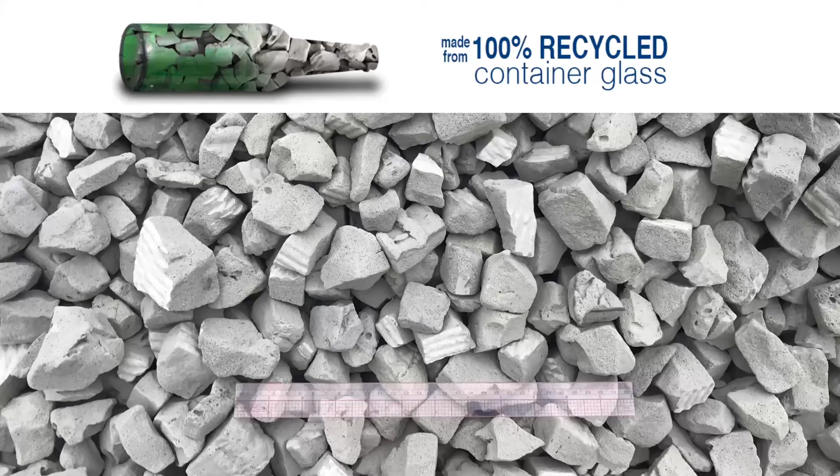All right, so the product that Aero makes is called Ultra-lightweight Foamed Glass Aggregate. And the photo that you see on the screen is a picture of foamed glass. I put the ruler down there at the bottom just so that you get an idea of scale. So it's a 12-inch ruler. So you can see that the particles themselves are going to be on the coarser side of most aggregates that civil engineers are used to seeing, right? So more of a ballast rock size as opposed to a typical 3/4 inch or 57 stone aggregate. This photo also gives you, I think, a pretty good idea of what that surface texture is of our material, right? So oftentimes I describe foam glass as a manufactured pumice material.

All right, so we are made from post-consumer recycled glass. We're not using silica, anything like that to make glass. We're using all recycled glass in our process. All right, so if you've never heard of foamed glass aggregate before, these are some of the attributes that we like to talk about in reference to our product. The first thing is that UL in front of the FGA abbreviation, and that stands for ultra lightweight. And the reason why we coined this ultra lightweight instead of just lightweight is because there have been many different types of lightweight aggregates available in the marketplace for many decades now.

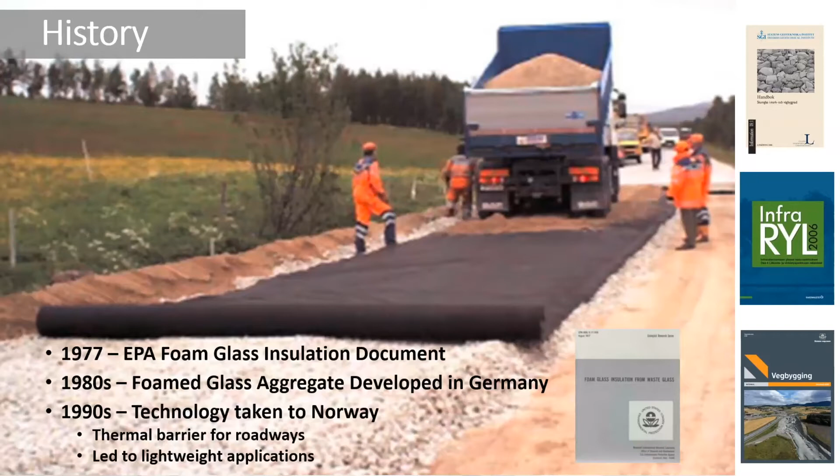All right, so as I said, our product is made from post-consumer recycled glass. It's generally collected curbside. And I know that this audience that I'm talking to now, you all are probably well versed in some of these statistics that I'm going to be sharing, but I always ask this whenever I present. I do a lot of education to engineers, architects, other stakeholders involved in our projects.

Because certainly I grew up learning that glass is this endlessly renewable resource that you can just continuously recycle into a new glass bottle or jar, and then you see the data, and it's very clear that we're not even doing that for 1 out of 3 of our containers that we're using.

All right, and this is definitely not my area of expertise, but as far as I can tell, there's a bunch of reasons for this, but I'll just highlight a couple of them. The first one is that most of our waste is managed in this country on a very local level, right? So you have maybe challenges related to organization, resources, that sort of thing. Everybody can make their own decisions. And it lends itself to a somewhat broken up system in how we're collecting glass, how we're recovering glass and recycling it.

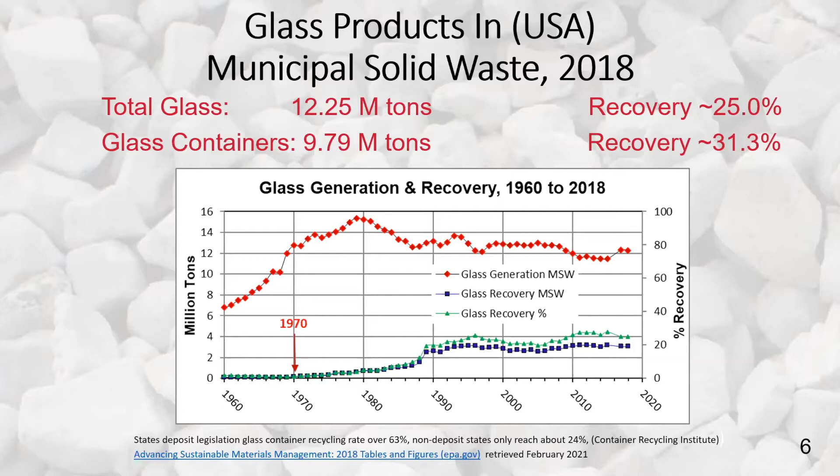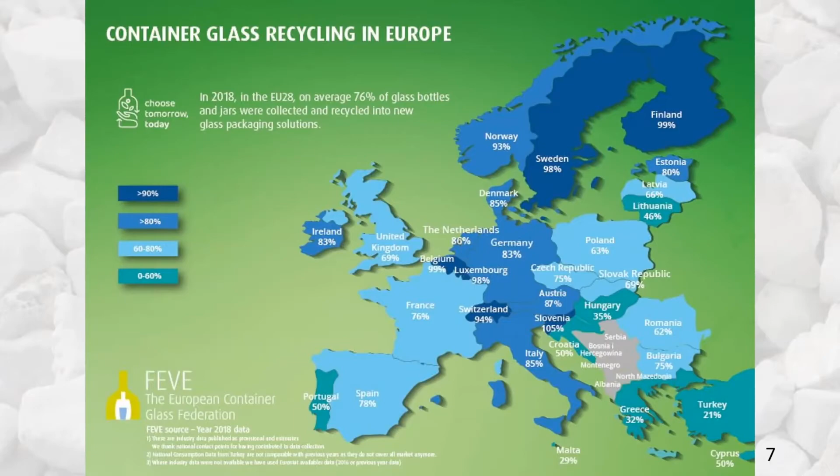Certainly we can look at those countries in Scandinavia that are over 85%, all of them. But in general, almost every country is doing better on the whole than we're doing currently in the US.

All right, so I want to tell you a little bit about how we make our product. One of the things I haven't mentioned yet is that we're actually able to take the glass that generally nobody else wants to take in order to recycle it into a new product or a new material. And that's these fine bits of mixed color glass that, as you know, generally can't be used to make a new glass bottle or jar. That's because they're too small to be properly color sorted, and most glass recycling processes need all of the same color glass in order to feed the bottling lines.

All right, so we're able to take these fine bits that, as I said, generally nobody else wants. When we get it, as you can tell, it's a fairly dirty stream.

Certainly we work with many different suppliers, and there's different values to the glass that we receive. Certainly the dirtier the glass, the less value it has to us, because we have to put in a lot of energy and effort in order to pull off all of these impurities that are not the glass that we're interested in.

So the very first step in our process is to do the best that we can to clean the glass. And the way that we do that is everything's dry. We're not using any type of effluent or wet process anywhere. We're using a lot of screens. We have several magnets in the system, vacuums, dryers, those sorts of things. But generally, it's a completely dry process, and we're trying to get the glass as dry as possible during this process as well.

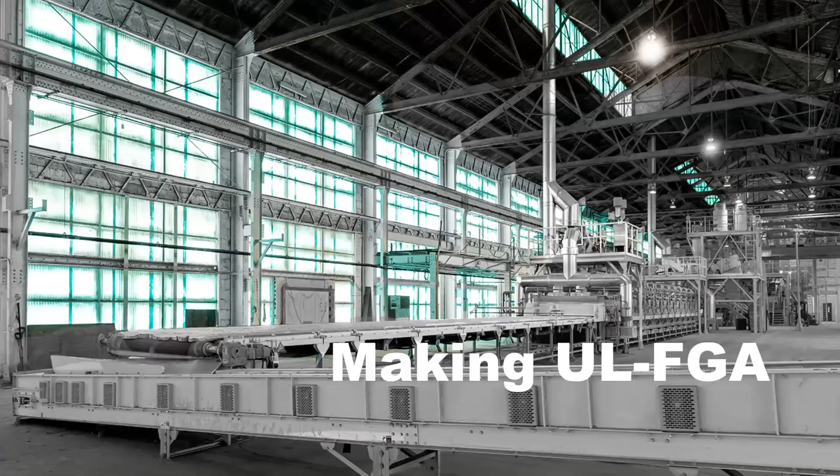I liken it to kind of the all-purpose flour that you would bake with. It looks very similar to that. The particle size is about 65 microns and finer. And when you mill the mixed color glass cullet down to that particle size, the glass can't reflect light in the same way. And so we truly are left with kind of this off-white, creamy colored powder that does look very similar to all-purpose flour.

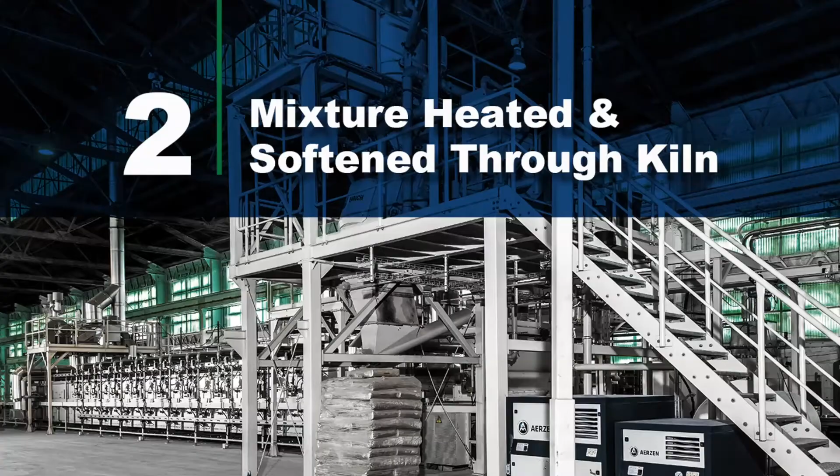All right, so if we look at the back side of the kiln where material is exiting, this is what we see. And it's a solid foam glass cake at this point. It extends the full width of the belt, which is just under 2 meters. And we've expanded that powder height. I mentioned it started at around 20 millimeters. When it's coming out, we've expanded it to about 70 to 75 millimeters. So you're seeing a volume expansion of about 3 to 4 times that initial powder height.

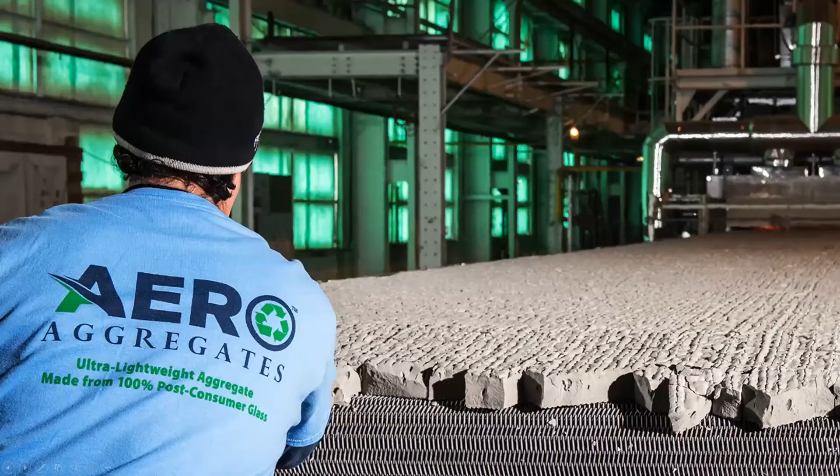And if you would walk along the cooling table with the product, you would be hearing this snap, crackle, and pop sound. And what that is: because of the temperature differential from being in almost a 1,000 degrees Celsius kiln to then being exposed to, say, around 20 degrees Celsius room temperature air, that is inducing thermal stress into the foam glass cake, and the cake starts to crack up. So by the end of the cooling belt here, we've already created these aggregate sized pieces that are going to fall onto the conveyor, as you see here, and head outside.

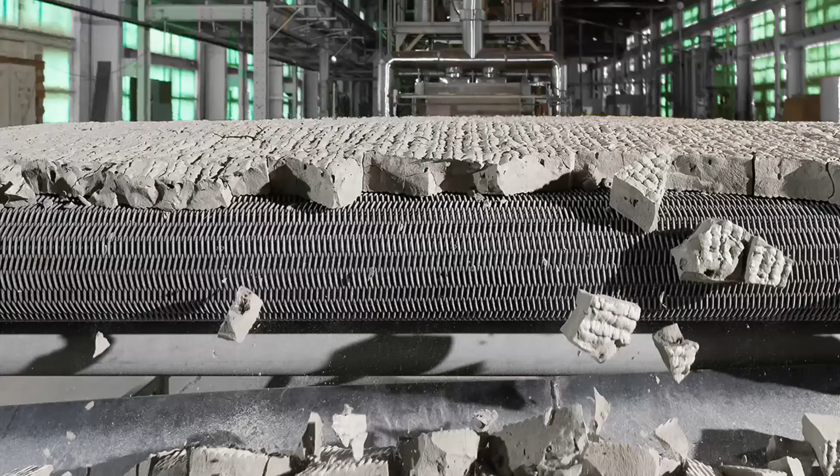All right, so product is still certainly warm here at this stage. It's not completely cooled off, but it's cool enough to have induced that thermal cracking that's necessary to have pieces of product. All right, so at this point, it goes onto the conveyor and it goes outside. We do isolate product until it's been quality control tested, but once it is QC tested, it goes into the larger product stockpile.

Okay, so I do like to clarify that there are different types of foam glass, and the process that I just described to you is the dry process of manufacturing a closed cell foam glass aggregate. This is by far the majority of the product that we make. There is a way via a wet process, using a different foaming agent, to also make closed cell foam glass aggregate. The companies that are manufacturing wet process material generally are making a less dense product where they're more interested in the insulation value than the durability and the strength characteristics. So wet process is maybe not a material that you would want to be using for infrastructure uses, but certainly in building envelope applications it's going to be a very good product to use.

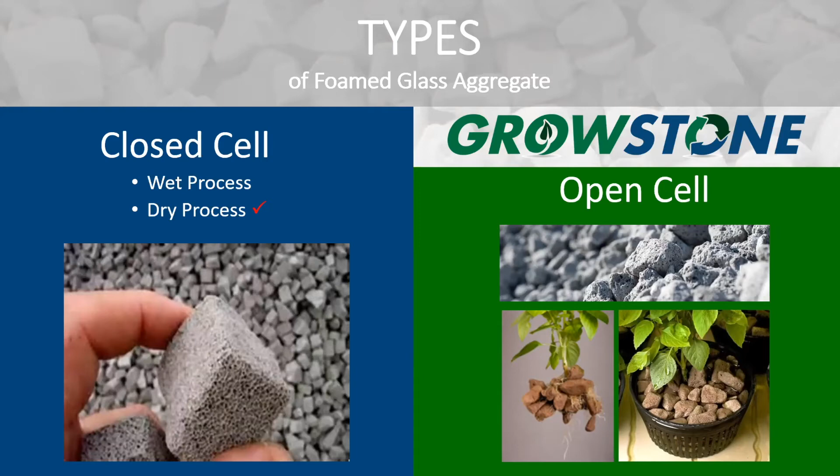All right, so if you do see the trade name Growstone, this is our trademarked name for the open cell product that we will make, or at least the majority of the open cell product for those types of uses. But as our company is expanding, we did find it useful to define some pillars that define some of our product categories. And so you can see them here.

Our original name for our company, Aero Aggregates. This is the ultra lightweight or insulation material for infrastructure uses. So, certainly it's the majority of material that we've supplied to date, but that might be changing in the years to come. The middle pillar here, the Growstone pillar, this is our open cell product where you're looking to use the foam glass as a moisture retention material or as a soil aerator.

And then the third pillar, the Aero Light pillar, this is kind of our catch-all. It does have both open and closed cell foam glass aggregate for all sorts of applications. So the filtration applications kind of live under the Aero Light pillar, as do some areas of R&D for us. And I'll just mention these. These also include sized material for use in lightweight concrete mixes, as well as sized material for use in lightweight cement or composite block materials.

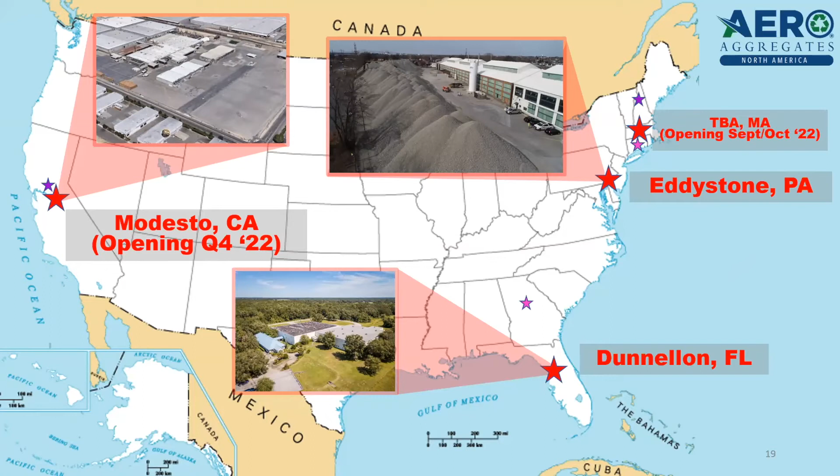We've also done additional testing to prove out the application areas where we see foam glass aggregate as being beneficial. So this includes testing to the AASHTO standard for MSE wall backfill, doing all of the durability and electrochemical testing requirements that they have. We did large pull-out testing where we're able to look at different types of reinforcing materials that you could use in combination with foam glass in MSE systems. We've looked at permeability tests. We've also done several different types of thermal conductivity testing in order to back out an R value for the material.

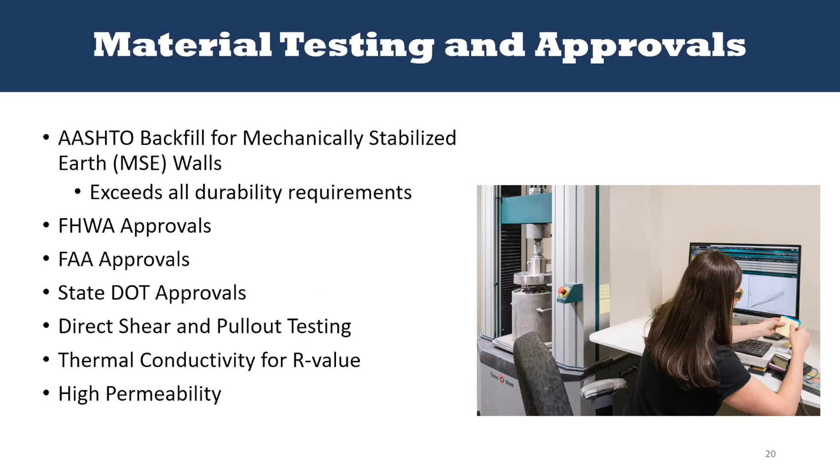All right, so shifting gears a little bit, I just want to tell you a bit about the application areas for foam glass and how we see it being used. I am focusing on the infrastructure uses here, but I'll also mention some commercial uses as well.

All right, so as a geotechnical engineer myself, if I'm looking to use a lightweight fill material, generally it's going to be that I need to reduce the load or weight either on soft compressible soils that are going to be susceptible to settlement, which will create a serviceability issue down the line. I might want to reduce the load or weight on some type of structure, and this could be a retaining wall, a bridge abutment, a parking garage, anything like that. Or it could be to reduce the load or weight on a utility, and most of the time this would be an existing utility, not a new utility.

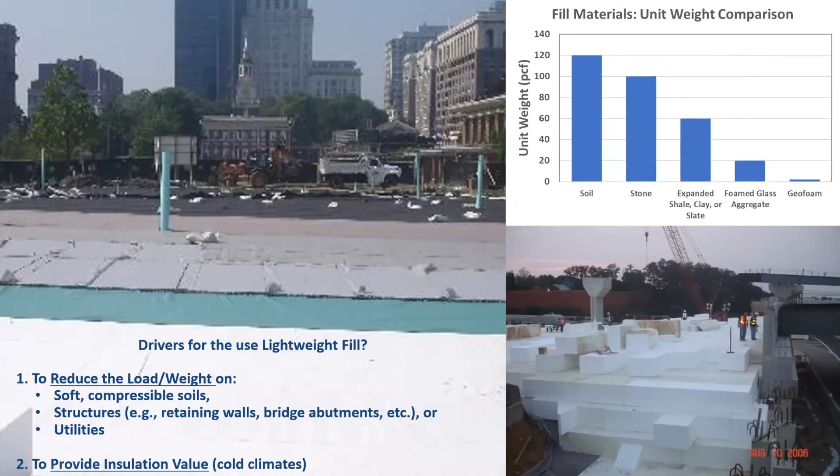All right, and here's another slide showing you a comparison of some of these materials. In the upper left, this is an expanded shale type of product. In the upper right, I didn't mention this previously, but there is a material called foamed concrete or cellular concrete that is used as a lightweight material. Your foamed concrete is made by mixing a foaming agent with cement and water, and then spraying it out like you see in this picture. And they can really dial in their unit weight, so they could be as light as, say, 20 pounds per cubic foot, or as heavy as 60 pounds per cubic foot.

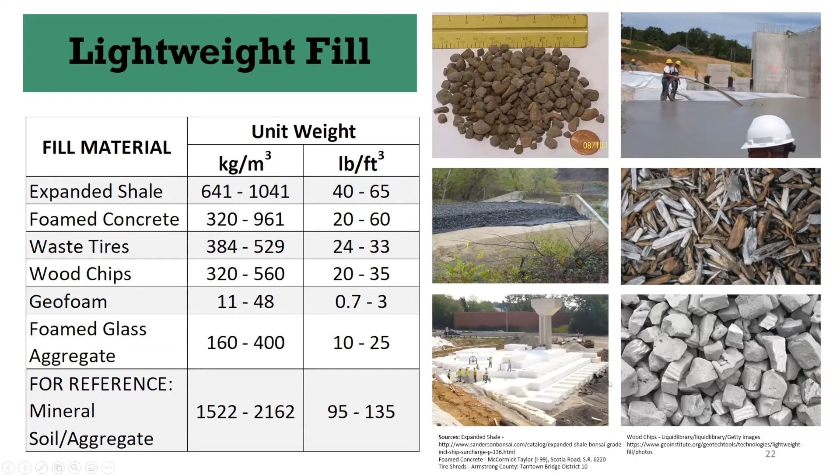The middle photographs here are showing you waste tires and wood chips that have been looked at in the past to maybe be used as a lightweight fill, but they're certainly not popular for the reasons that you can probably imagine. And then here at the bottom, we just have a picture of geofoam and then foamed glass.

If you're doing any type of roadway widening, say you have to add another lane or expand the shoulder, frequently if you have clay soils underneath the road and you build up the embankment adjacent to your existing embankment, you're going to induce settlement in that area. If your existing embankment has been in place for 50 years, those underlying soils have had time to consolidate under that weight, but your expanded shoulder area certainly has not. So if you utilize lightweight fills, you can start to mitigate some of those settlements.

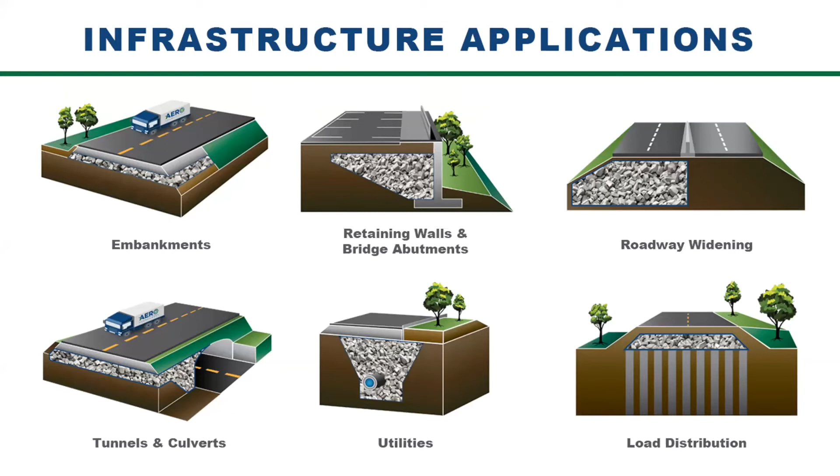And then the last schematic here is just showing you an example of a load distribution platform. So this would be where we want to build up a roadway embankment, but we have very soft soils. And so what we're doing is we're using a deep foundation element to transmit the load of the embankment structure down to a stiffer layer below. And so, instead of using normal weight materials for that embankment fill, if you use a lightweight material, now you can optimize the number of the deep foundation elements that you have to use in these systems.

And I can tell you as a geotechnical engineer, these areas close to waterways are where we have some of the most marginal soils. These are the soils that are going to want to compress when you put an additional load on them. And so, if you're using a lightweight material to do your grade raise, you're going to be reducing the stress on the underlying soil. So, hopefully you won't see settlement in this embankment over time.

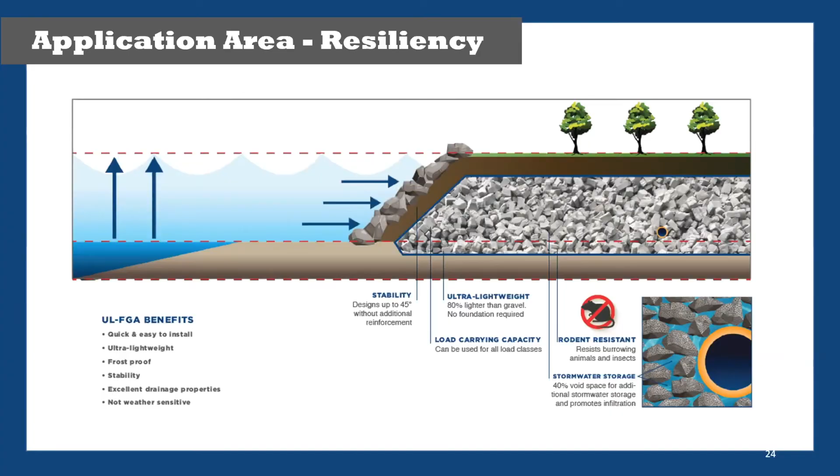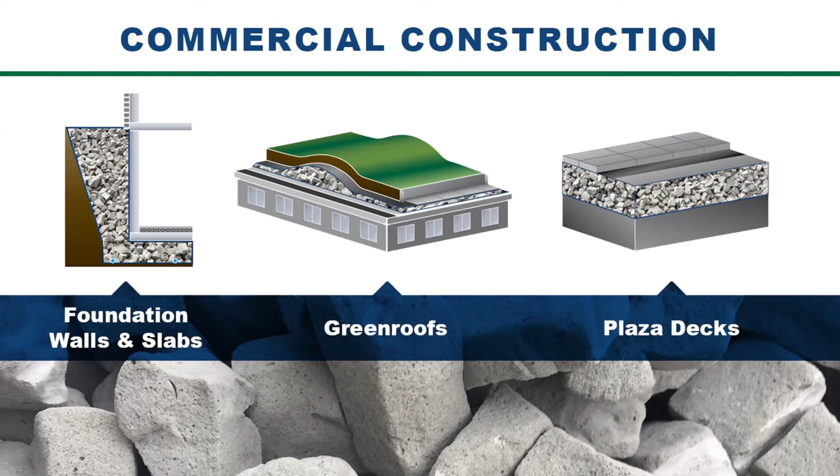Our current bag size, I think, is a 3 cubic yard bag. So very large super sacks that we can then either put on flatbed trailers to go to a project site, or we can put them in an intermodal container so that it'll travel at least part of the way via train.

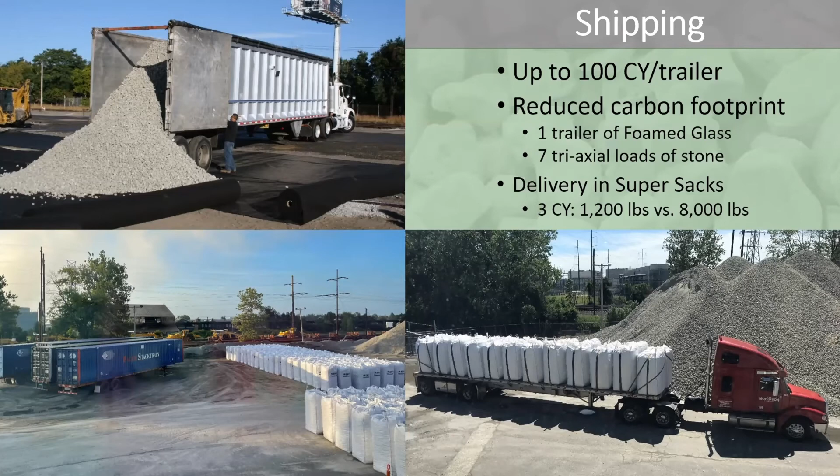We're then making the product and shipping it all over the country, being able to do that pretty efficiently because of how light it is. And then that material is being utilized in many of the same communities where that glass is being sourced from in the first place.

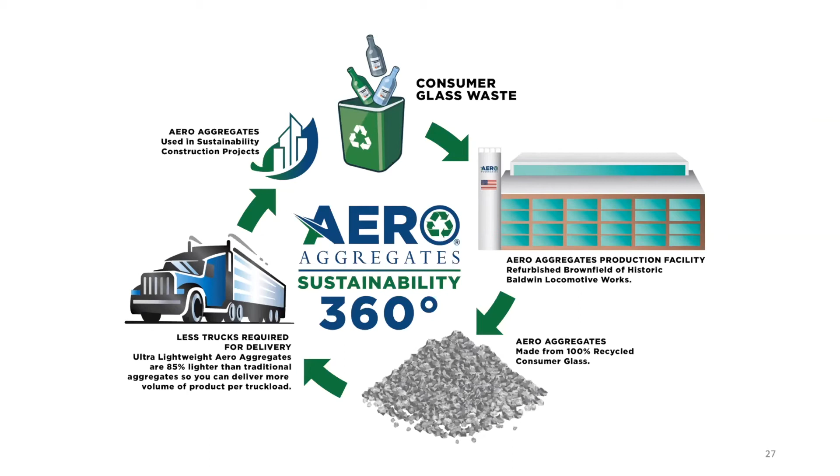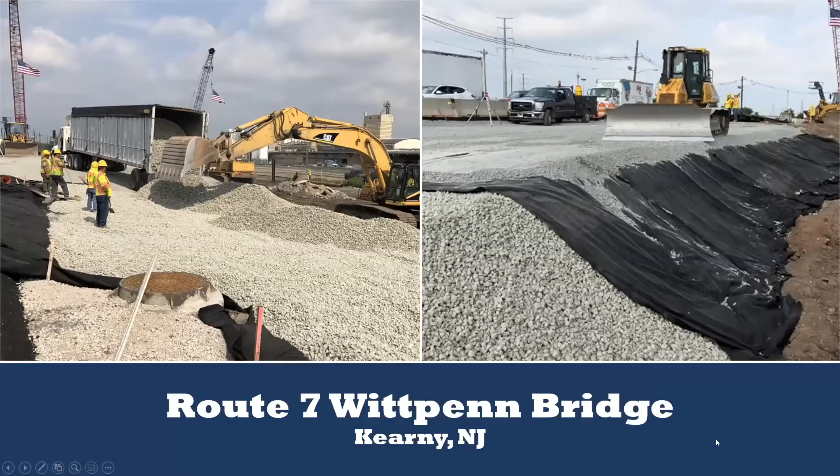All right, this is a large DOT project in New Jersey. It's in Kearny. It's the Route 7 ramps related to the new Wittpenn Bridge construction. This area in Kearny is right adjacent to the Hackensack River. There's about 60 feet of very, very soft clays in place. When you're dealing with that thick of a layer of soft material, there's really no way to do ground improvement other than either using lightweight materials or putting a surcharge on and waiting months to years for that consolidation to happen before you start to build.

So they chose to do actually a combination of those things, but they're utilizing foam glass on the construction of many of these new ramps associated with the bridge. I really like the photo on the right because you can see how they're building up the embankment with the foam glass aggregate. This black fabric is just a non-woven geotextile, basically a filter fabric. And then on top, they're putting a layer of what they call DGA, dense graded aggregate, which is part of the pavement section on top.

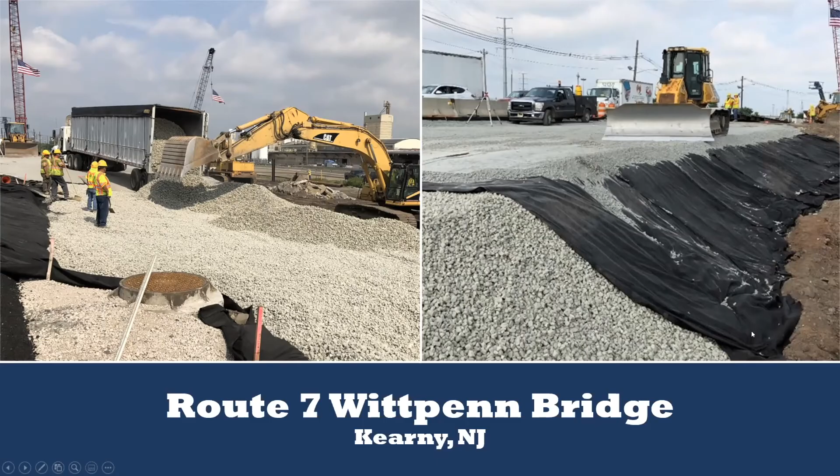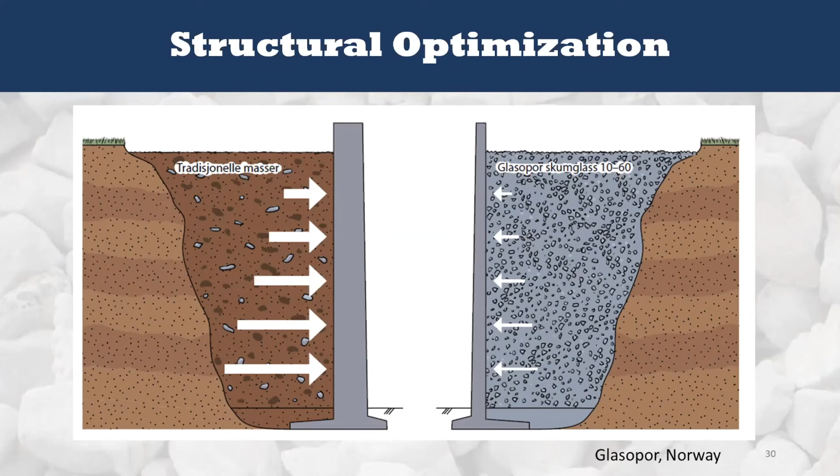All right, and so this was a project that was kind of driven by those concerns that I just mentioned. This is along I-80. It's in Denville, New Jersey. So this is where 80 crosses the Rockaway River. And the DOT was replacing this dual span bridge. However, they wanted to reuse the existing abutments. Okay, so they wanted to reuse the abutments, but the new spans needed to be about 5 feet taller than they originally were because of hydraulic reasons with the river itself.

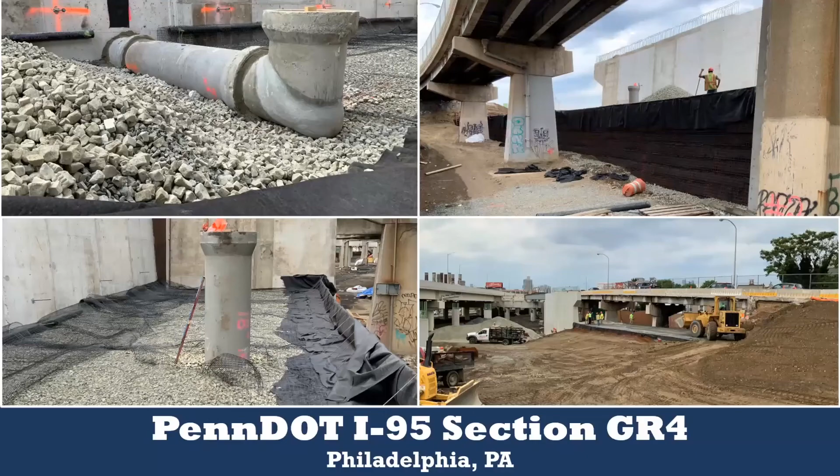All right, this is a project that occurred in Philadelphia. There's a lot of work related to I-95. There's only about 50 miles of 95 in Pennsylvania, but I feel like they're working on at least half of those at any one time. But this is work just right north of Center City, and it was related to an on-ramp for 95 South. So in the upper right, you can see the existing on-ramp. It's an elevated structure. So it sits on these piers, which are then founded on deep foundations on piles below the piers. And so they were switching the design from being this elevated structure to being an embankment.

And what the concern was is they needed to keep this on-ramp in service, but if they built up this embankment right beside the piers with normal weight fill, they were worried that they were going to start to kind of squeeze the soils beside those existing deep foundations and undermine this structure. Okay, so it was basically a constructability issue that caused the need for lightweight fill in this section of the embankment. And you can see this fabric in the bottom left. This is a type of geogrid reinforcement that was used behind the new abutment for the ramp.

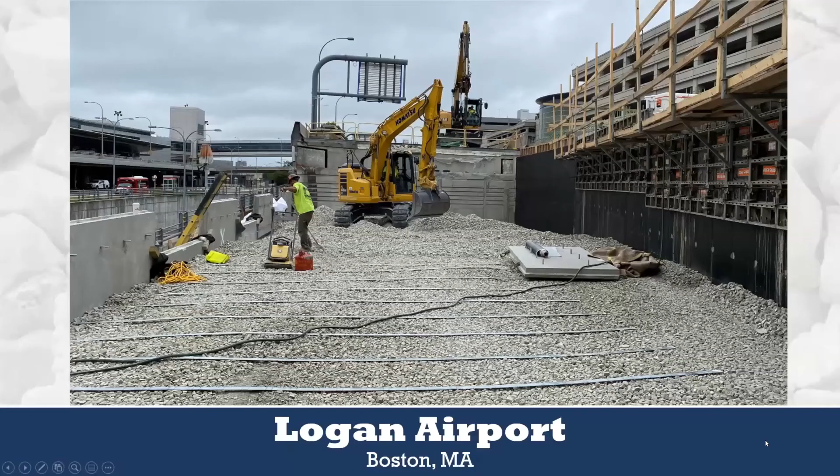All right, this project was at Logan Airport in Boston. Again, associated with a new ramp connected to a new parking terminal, I believe. The total height of this embankment was just under 20 feet. Logan, like many airports, is built almost entirely on reclaimed land. So whenever you're doing a grade raise, you have to mitigate for settlement because you would almost assuredly see settlement over time in these areas. So at Logan, this was another embankment structure that was reinforced. In this case, the strips that you see here are made out of galvanized steel, but they do the same job of reinforcing the mass of aggregate.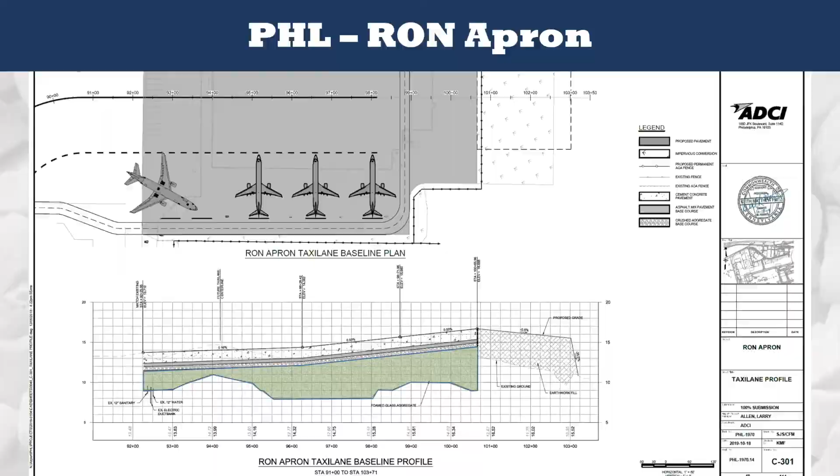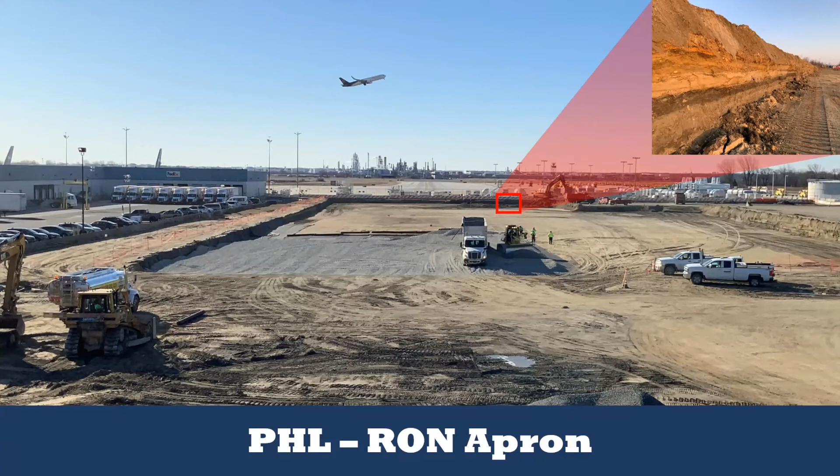And so you can see it wasn't a consistent thickness of foam glass aggregate. It did vary, say anywhere from 2 feet thick to maybe 10 or 12 feet thick, depending on existing conditions and proposed conditions. So here you can see in progress some of the work that was happening. It was a nice large area. We do think that this is probably the largest foam glass aggregate project in the world to date. Here we are highlighting the excavation. You can see this layered soil that is existing, and that absolutely would create problems over time in terms of settlements. And then here it is a little bit closer to complete.

And I do like to mention that we were actually able to supply over 3,000 cubic yards a day to this project. So the total amount that we supplied was close to, I think, 100,000 cubic yards, but we were able to do that in a matter of, say, about 45 days.

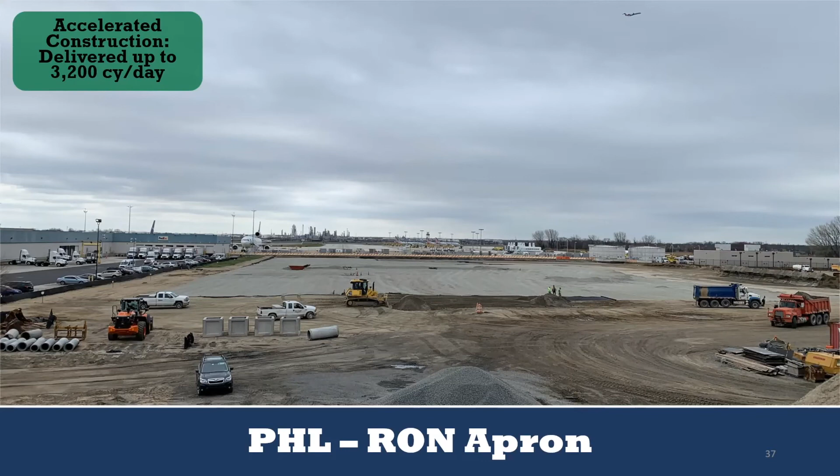All right, I think this is my second to last project that I just wanted to show you, but this is utilized frequently in situations where you do want to use foam glass as an insulation material. And it seems to be very popular with some of the green building organizations and passive building designs.

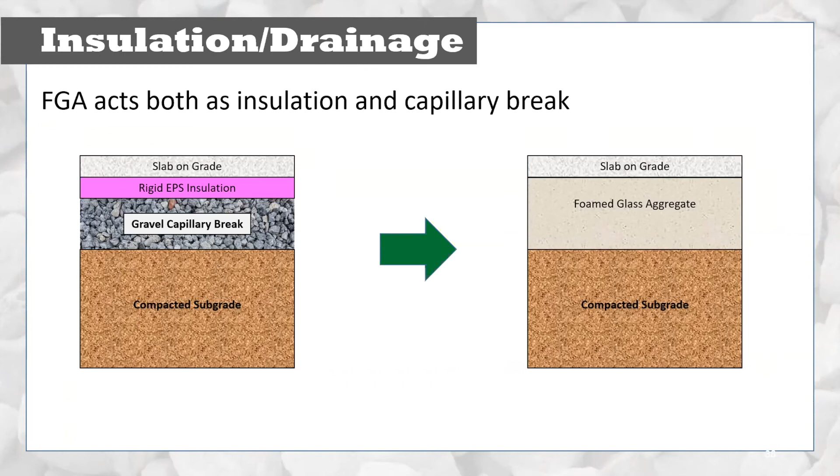And so here, what we're showing is that the foam glass actually is replacing two things that are typical sub-slab. The first thing is your rigid EPS or XPS insulation board. And then the second thing would be your gravel capillary break layer. So foam glass can replace both of those things. So it's not just a one-for-one with the insulation, which is frequently what people look at, and we have to explain that you have to look at this as a system.

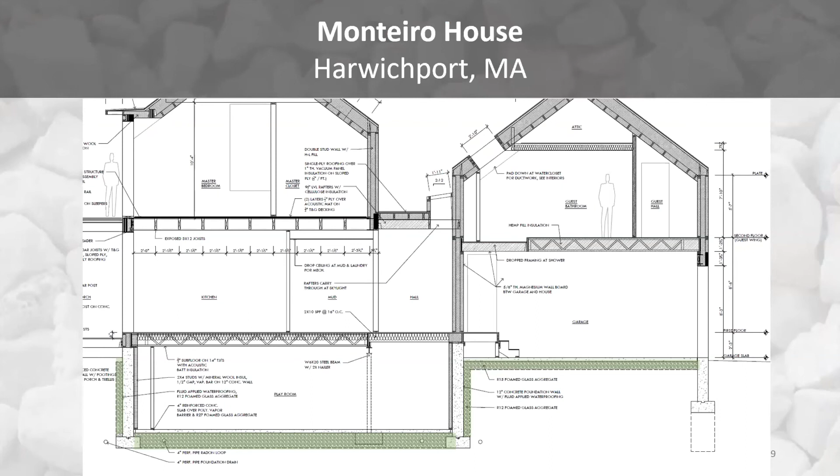All right, so here are some drawings from a passive home construction on Cape Cod, and you can see that they're using a decent thickness of foam glass sub-slab as well as around the basement walls. And here is that material going in. We were able to supply this project in bags so that the bags could just be opened up and easily installed in place.

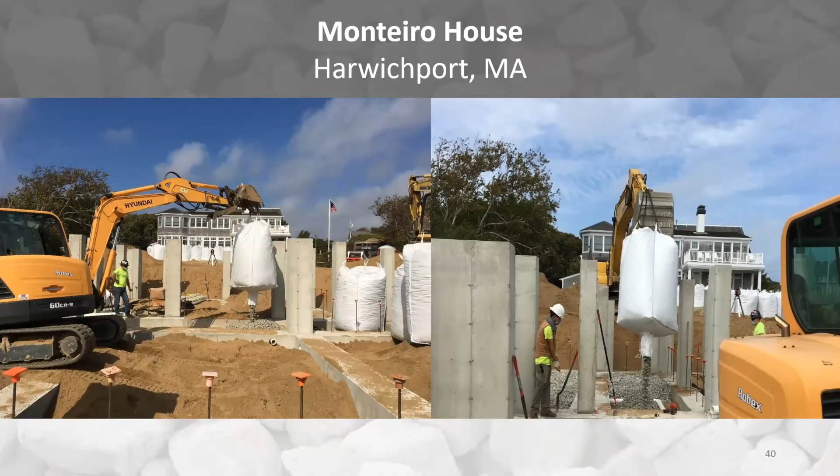All right, and then here is a project in Camden, New Jersey, related to a new pier redevelopment. The existing pier is over 100 years old, and there's a lot of development happening in Camden right now, including headquarters for a company called American Water. There's an aquarium just south of this site, and it's seeing a resurgence at this point in time. And so they wanted to create a nice lookout spot on the pier so that you could see Center City, Philadelphia across the Delaware River.